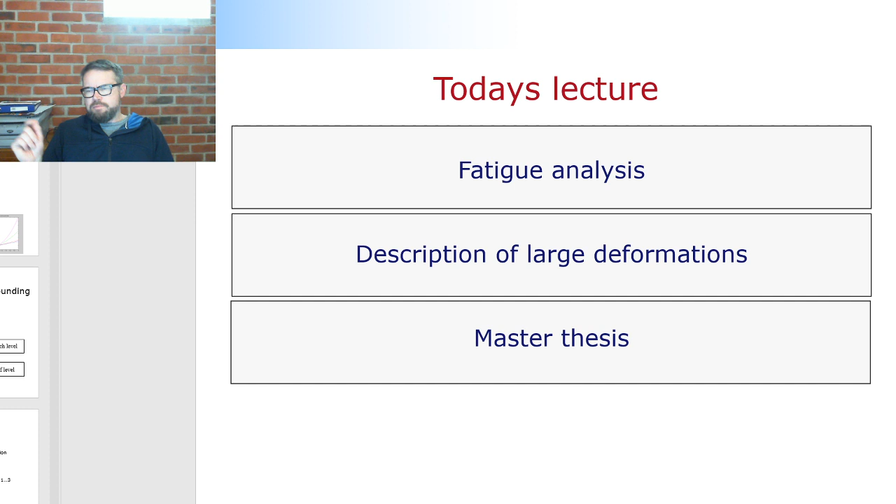Now, today, well, first of all, we are approaching the end of the course, so there aren't that many subject matters to discuss anymore, but I would like to wrap up this discussion about fatigue analysis and how multi-body system dynamics can be used as part of fatigue analysis. That's going to be the first topic today.

And then I would like to spend some time discussing how large deformation can be described in a multi-body framework. This is going to be the main body of today's lecture.

It's a subject matter that is quite painful because the theory behind large deformation is unpleasant. It is very involved and mathematically quite challenging, and that's why I don't want to spend too much time explaining all possible details to you. But some matters I feel are good for you to be aware of, things I'm assuming are good to have as basic engineering knowledge—those are what I'm planning to explain to you today.

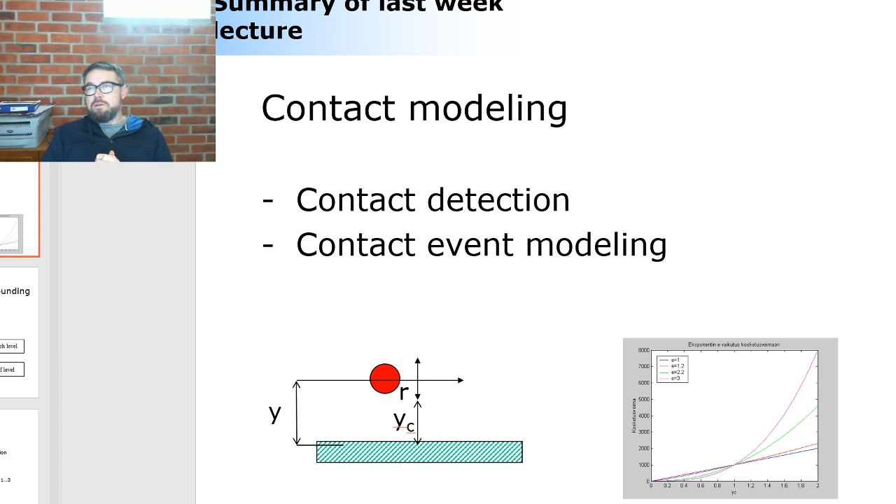By the way, I can see that when my camera is on, I'm looking much better than last week, because last week I did not put much effort into my appearance, but today even my hair is not looking as crazy as it was last week.

So, here's a little bit about how contact detection is based on the bounding box method. As the title implies, the bounding box is a box where the bodies or systems go inside. We have many different sizes and levels of boxes. The highest or largest level is the root level, meaning big objects in your world or models, such that an entire vehicle or entire building could be within one big box, and this is a root level box.

Then you go to a more detailed description. Within the root level boxes, you may have a number of branch level boxes, and finally within the branch level you have a leaf level, which consists of drawing primitives. These are the detailed description of where the contact takes place. This just tells you if there is a contact, and if so, where it takes place and between which bodies.

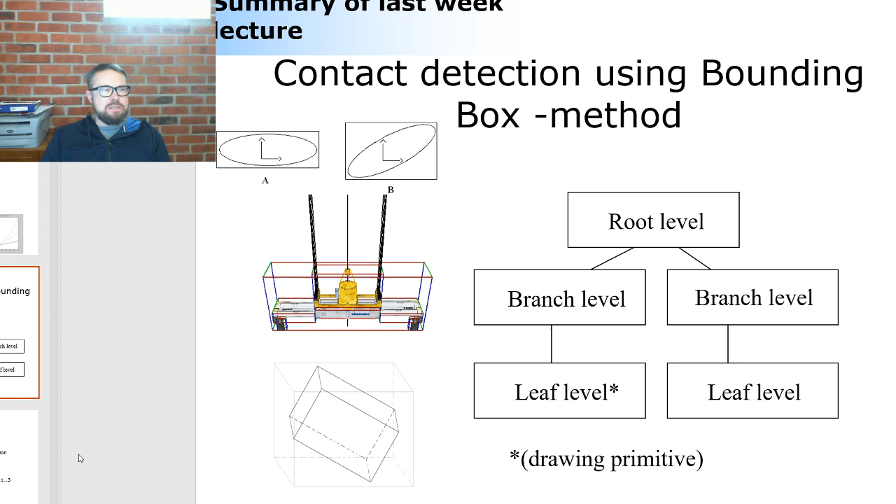Then you move on to the next level, which is a description of the contact itself, and typically this is carried out using a penalty force approach. There are many different varieties in a penalty force description, but the simplest is the one where we just measure the penetration indentation.

In this equation, x is measured as the penetration, and we have a stiffness associated with the contact, which is a material parameter telling how stiff the contact is, or how stiff the surfaces that are penetrating are. Typically this penetration is raised to power n. N here is often a number other than 1, because 1 introduces a bit of discontinuity at the location where the contact just takes place. If it is 2, the contact is smooth and more progressive, which typically helps the computation a bit.

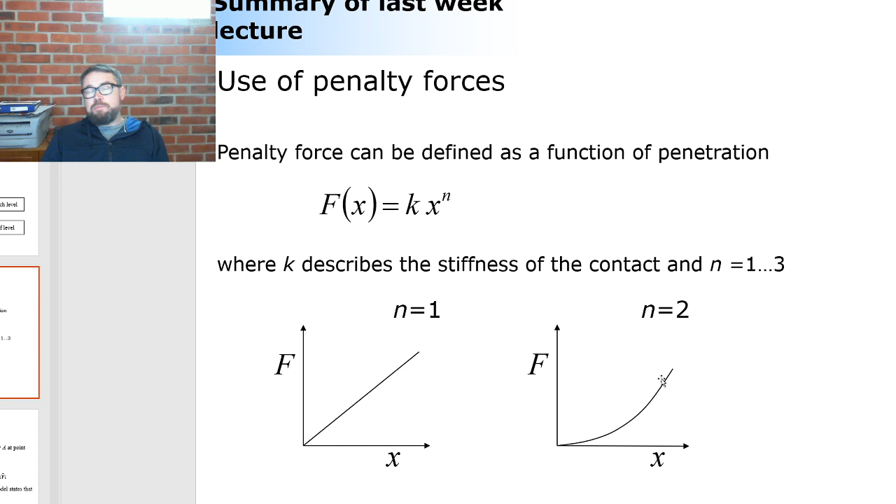The complementary approach is a completely different view of the contact event itself, and this is typically used when you have a huge number of possible contacts. This method is based on inequalities, and there are a number of inequalities, and then you use an optimization procedure to figure out how the system of a very high number of bodies behaves.

Remember, last week we looked at the YouTube movie from Dan Negrut, and he called this a many-body method, not multi-body method, but many-body method. That comes from the fact that there's a huge number of bodies capable of contacting each other, perhaps a million or more bodies that can contact. Again, this is based on inequalities, a mathematically very painful approach, but one sometimes used in the multi-body framework.

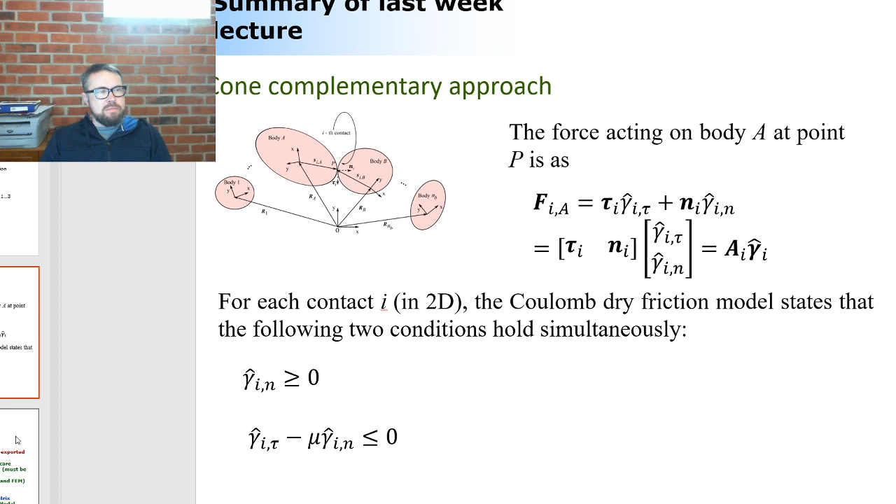Then last week we moved to a completely different subject matter than contact: stress analysis based on multi-body system dynamics. This is needed because often information that is good to know from the virtual prototype is related to strains and stresses. At the same time, even though this is information that is often needed and very useful, it is not necessarily very straightforward to obtain.

That's simply because often we are dealing with rigid bodies. And even if we're dealing with flexible bodies, where we describe the deformation of particles and bodies—particles are not deforming, but the bodies deform—it is still not that straightforward to go from deformation to strains and stresses.

There are two alternative approaches to make that happen. The first possible approach is that we could take all the forces applying in a rigid or flexible body. Because at any given time in multi-body system dynamics, the body is in dynamic equilibrium, meaning all the forces applying in the system are in equilibrium. That means all the external applied forces, reaction forces due to constraints, and inertial forces, when accounted for, are in dynamic equilibrium at any given time.

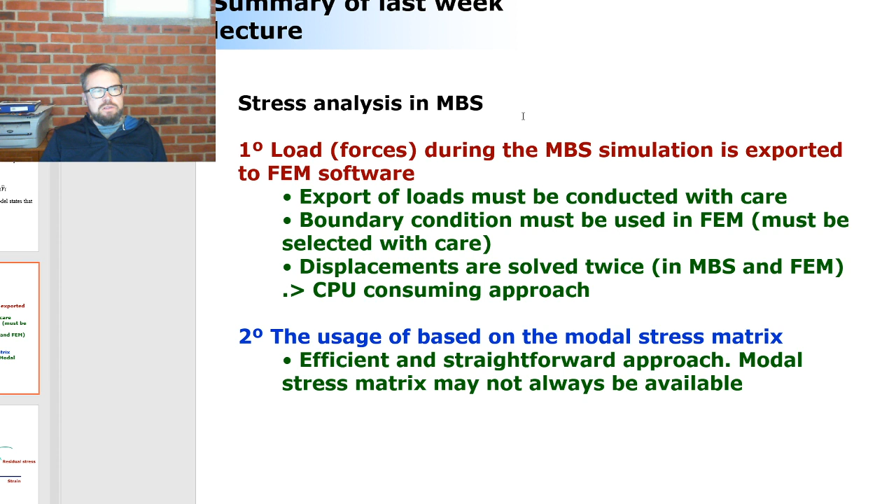Okay, finally, now what we discussed last week—shortly, by the way, the first in-class quiz will be on this subject matter. We discussed a little bit about the fatigue of welded structures.

Welded structures are very special structures, and that's because of two different things. First of all, welded structures can be assumed to include initial cracks. The crack initiation process, which is very lengthy in non-welded structures, is non-existing in welded structures, because the welding process itself introduces very microscopic, very small cracks to the welded toe.

The welded toe is the one located right here—if you see my pointer, yes, you're able to see that. So that's where the welded toe is located. When you look at that very carefully, there are microscopic initial cracks. So even if you have a brand new vehicle or bicycle, if it's made using welding, it's a fair assumption to say there are initial cracks.

And then it's all about the crack propagation process—that's what we have to control in welded structures, to make sure that even though there is a crack, it's not growing too much. Crack propagation is the one that takes up most of the time in the fatigue life of a welded structure.

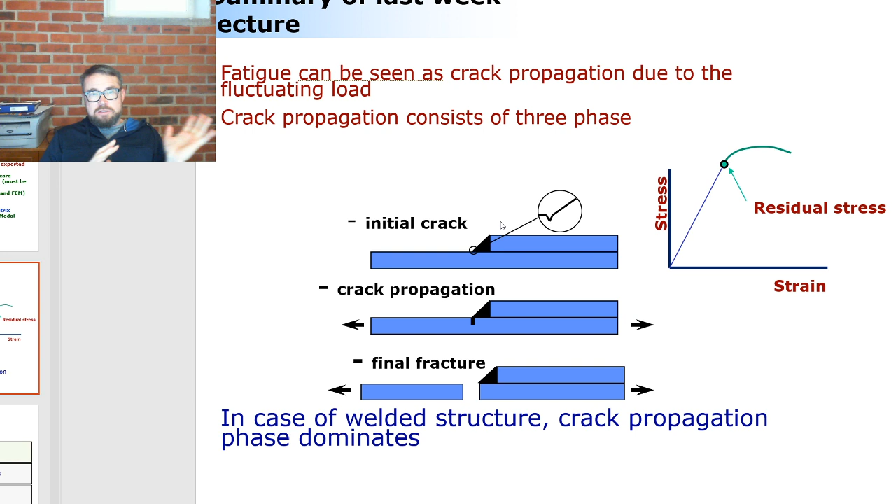We can get back to that in a second, but let's complete this story about fatigue analysis. Sorry that I'm a little slow today, I'm getting started with new subject matter.

Now, fatigue analysis itself—we're speaking not about what happens in reality, but how we can use computer technology to make a prediction about fatigue life. What's needed in a fatigue life prediction is that we have to get the stress history one way or another.

The stress history could be, say, how are the stresses within one hour during the operation of a machine, or how are the stresses within one work cycle, and so on and so forth. It doesn't really matter what the scale is, but this will be the scale of how fatigue is then measured. Let's say I have a hypothetical work cycle, like using a crane.

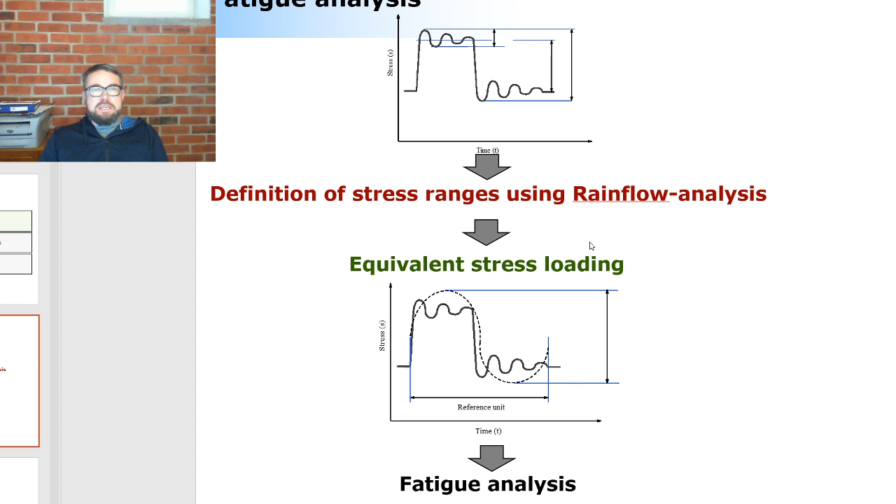Now this is what happens in reality. When you look at what happens very close to the location where the crack is growing, there's a lot of geometrical nonlinearities, and these will increase the stress right where the crack is growing. Using multi-body system dynamics, these rises of stress due to local geometrical non-smoothness cannot be accounted for. So only the level of stresses that keeps the entire structure in equilibrium is something we can take into account, but not the local stresses due to geometrical nonlinearities.

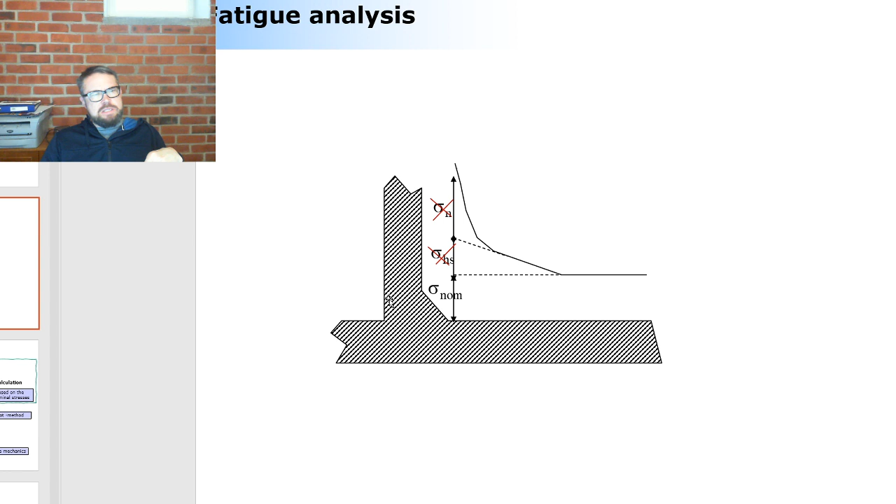But if you want to use these stresses to make a fatigue prediction, you can use literature or make very detailed finite element models to see how these local geometrical details are affecting your results. So from simulation, you can get the nominal level stresses, meaning the level of stresses not affected by geometrical non-idealities, and this is where you can do the fatigue life estimation. We are not going to take a look at the details, but that's how it goes.

If you want to move on to a more detailed description, you can use parameters coming from either literature, detailed finite element or boundary element analysis, or measurements. And even if you want to use fracture mechanics, again you can use literature or detailed finite element and boundary element analysis. So typically in multi-body dynamics, we are limited to this particular section only.

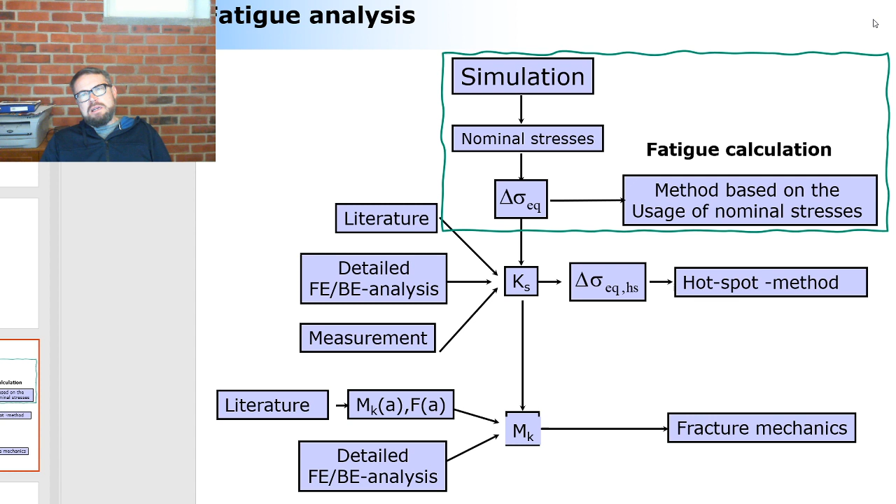Alright, so here's an example. This is a crane that is hydraulically actuated, and it consists of 3 hydraulic circuits and 4 flexible bodies. The bodies are the pillars, lift arm, swing arm, and the telescope arm that is now active in this figure.

The hydraulic circuits are lift arm, swing arm, and the rotary actuator that turns the crane. The crane is loaded by a mass, and the mass is connected to the end of the crane by a rigid link.

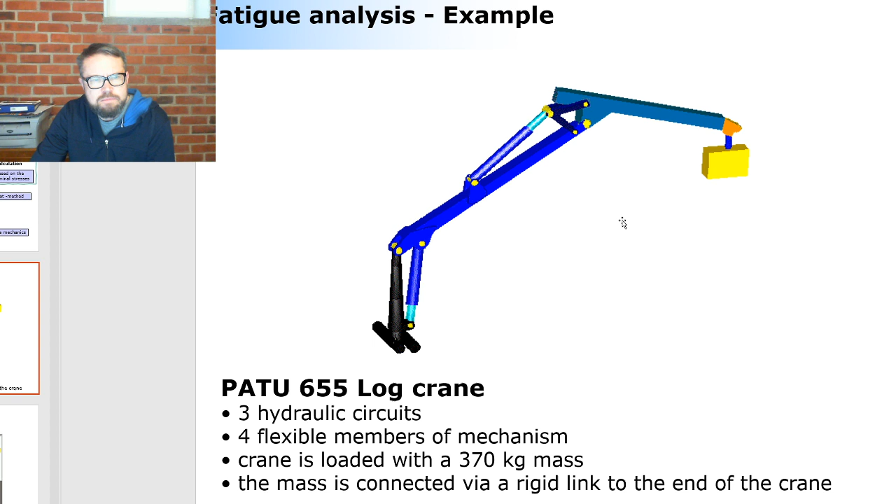This is how, I apologize that the quality is blurred, so it's not very good picture. But if you take a close look at this particular person here, it's too bad you're not with me in the lecture, because it would be fun to organize a competition to guess who this is. Yes, it is me.

Sad to say that I'm unwilling to do the math, but yes, 25 years ago, more or less exactly. So this measurement was carried out as part of my doctoral dissertation.

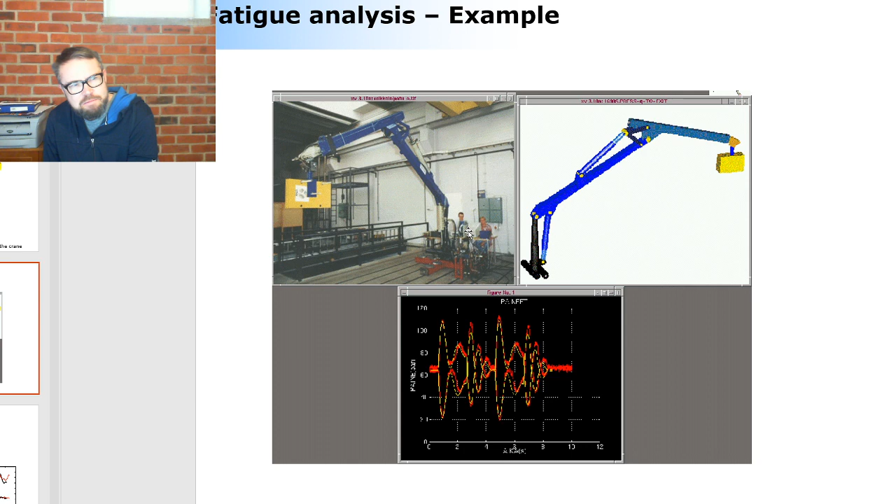Now this is how the stress history looked like. There's measured and simulated stresses, and the stresses come from using this linear theory of elastodynamics technique, while the measurements are carried out using strain gauges. As you can see, the match is very good, so it's looking very good.

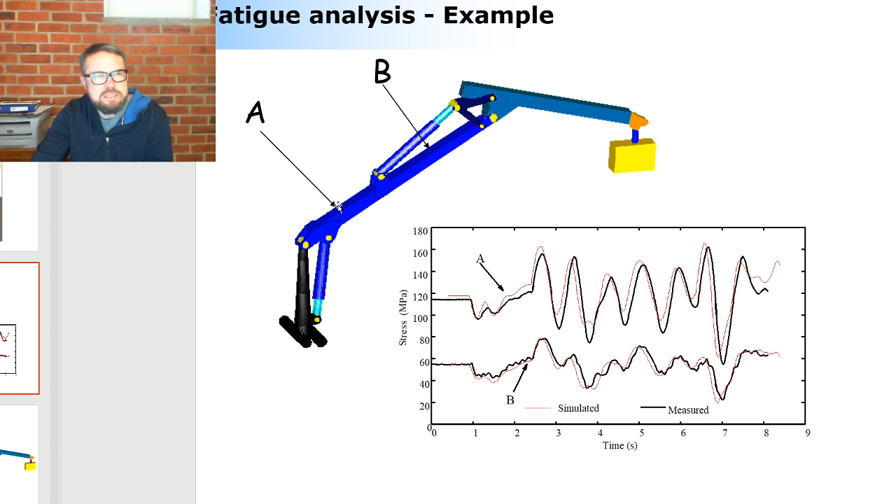We were looking at 2 details here to estimate the fatigue of these details, and the particular problematic detail was the one located here. By the way, this crane is still located in the university laboratory, which is now run by Heikki Handroos.

One of the important lessons from this particular structure is that you have to consider welding as a kind of good friend that can be your enemy as well. That means you have to understand that welding is a risky business, again because of these 2 mechanisms: the initial crack and high residual stresses.

So you don't want to put welding into a location that is highly loaded. Here's an example about this particular crane where most of the welds are really nicely made, not located in areas that are highly loaded, with an exception, and the exception is this one here.

There's a welded nut, used to make hydraulic pipes travel from here to the swing arm. These nuts can be located anywhere you want, and because of that, it makes no sense to place them in a highly loaded area. They are welded to the main boom, and because they are welded, there is an initial crack and high residual stresses, and this is where this particular crane was actually damaged.

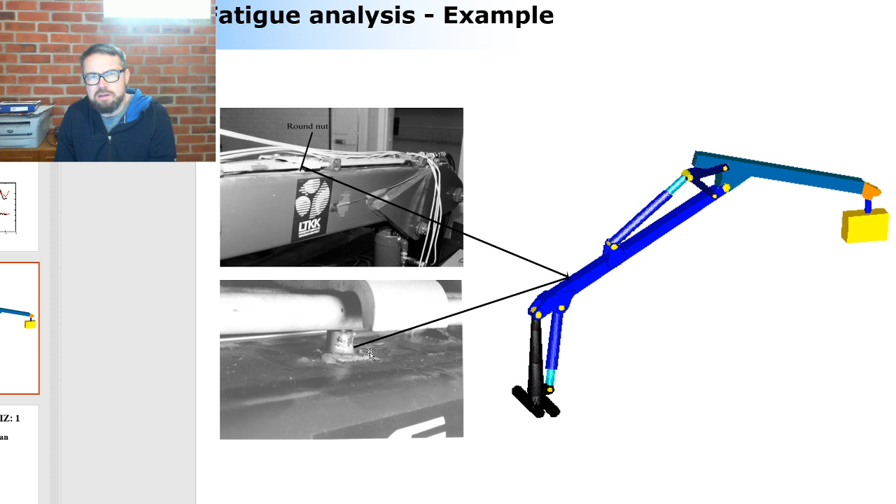So the lesson is: make sure that you're careful with where you're placing your welds.

Now I go back to this question I mentioned earlier. Fatigue of a welded structure can be improved by using a high or ultra high strength steel, using paintings or other finishing techniques, which makes kind of sense because if there's a crack, you paint it, you don't see the crack. It's like an 'if you don't see it, you don't have it' kind of technique. That's option number 2.

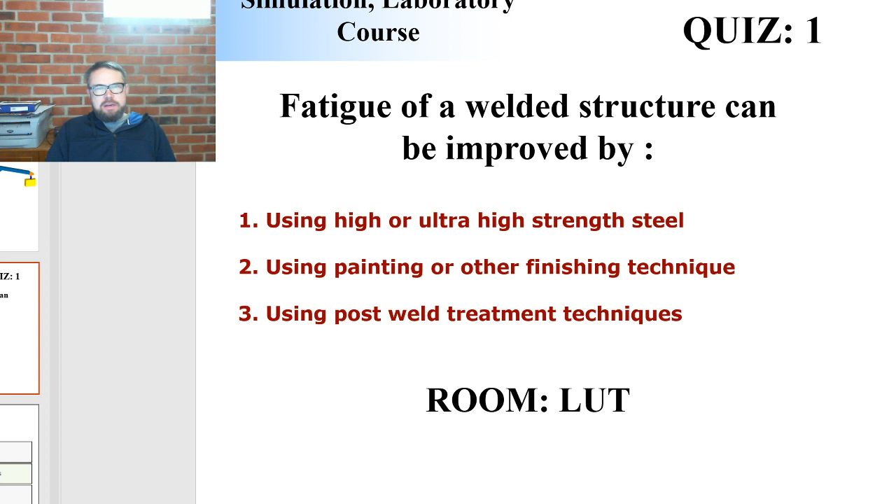Okay, so what is your estimation? What do you say? I think because there are now such strong hints about what the correct answer is, that this is going to be not 100%, but 90%. 90%.

So, using high or ultra high strength steel is a little bit problematic because it's not really solving the two problems associated with welded structures. Using post-welding treatment techniques, this is the way to go. Why isn't the steel approach solving it? Because of residual stresses and initial cracks.

Now what follows is a discussion about large deformation. But first, I really need your feedback on whether or not you want career counseling. If you'd like that, I'm willing to do it next week. Next week's lecture will be wrapping up everything from the second period, summarizing all the visiting lectures, and giving you questions that might be asked in the exam. If you want, that's also an opportunity to discuss career counseling.

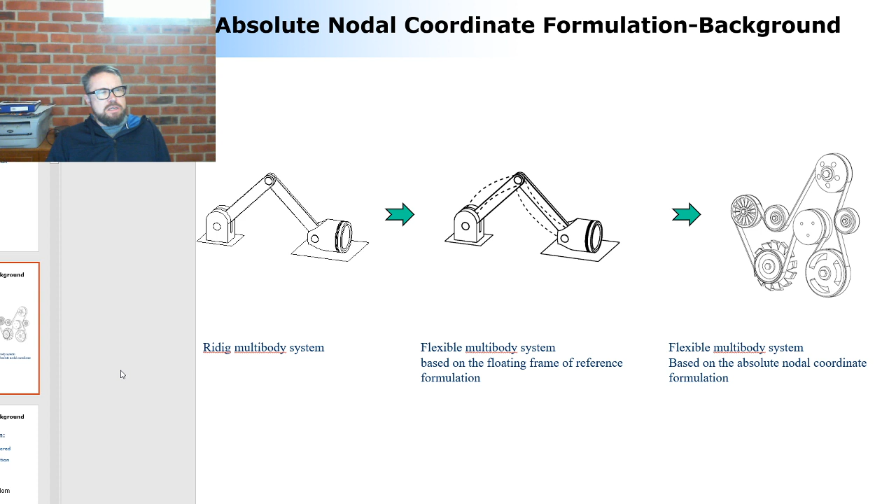Now we're going to take a look at the big picture of the absolute nodal formulation, and see how much time it takes. If we have enough time, I'm also going to discuss master's thesis topics.

Now, what is an important thing when selecting master thesis? The absolute nodal formulation - that's the method we're going to discuss, and that's a method that fits well to structural elements. Structural elements are, roughly speaking, cables, beams, plates, shells.

The special structural feature, like in beam-like structures, is the fact that the beam is very long and the cross section is very small compared to the length of the structure. Plates and shells are very thin, and that's a special feature related to that. Cables are a kind of special case of beams, and this is where the absolute nodal formulation fits well. So it's not using solid elements.

Solid elements can model pretty much everything you want, but it easily gives you a very high number of nodal degrees of freedom. Whereas using cable, beam and plate elements, you typically don't need that many degrees of freedom.

Now, the special feature about absolute nodal coordinate formulation, this is really the core feature of the method, is that it can describe kinematics from any kind of configuration by just using the element shape function matrix and the vector of nodal degrees of freedom.

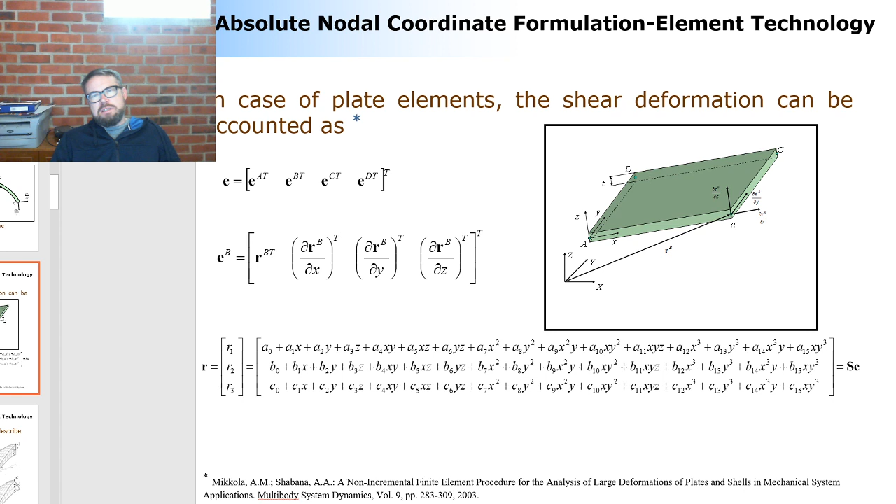So this is how it looks in a beam structure, but this question that I was about to explain, what these additional degrees of freedom describe. Well, they describe cross-section deformation, or fiber deformation in the case of a plate structure. Cross-section deformation means that the cross-section can distort, like shown here. It can be elongated, stretched, or compressed. So this is how it behaves. Cross-section deformation, typically never accounted for in conventional finite element method, is now accounted for in the absolute nodal coordinate formulation. So that's a special feature.

So now I know, I don't see your faces, but I'm guessing that this is as painful as it gets. But let me go back and try to explain what you need to know in terms of the written exam.

Okay, the absolute nodal coordinate formulation. This is a method where the kinematics is super simple, because the kinematics of deformation and large translation and rotation, rigid body translation and rotation, are all accounted for by using a simple linear combination of the shape function matrix and vector and nodal degrees of freedom. Conventional finite element method does not behave like that. It is not capable of describing these large rotations and large translations using this simple kinematics. So this is the first thing that I'm expecting you to know.

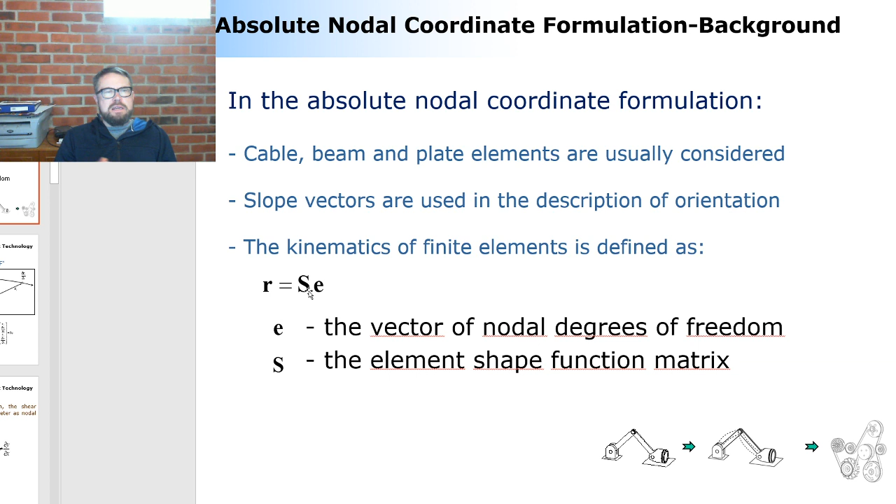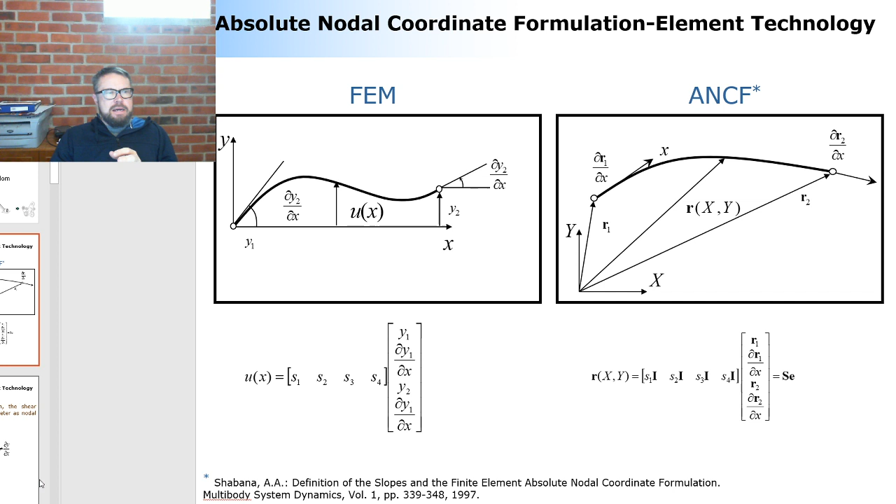The second thing, how is this possible? It is possible because I'm adding nodal degrees of freedom to one nodal location. So in one nodal location I can have many degrees of freedom. Some of them are related to physical displacement and orientation, but some are related to what happens internally, like what happens to the cross-section itself. And that's what the absolute nodal coordinate formulation does for you, capturing the transverse shear deformation, which is important in the case of thick structures.

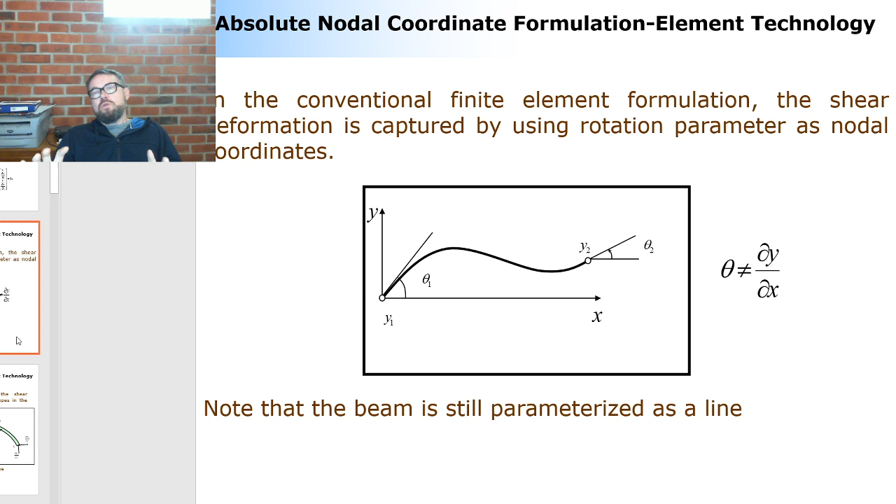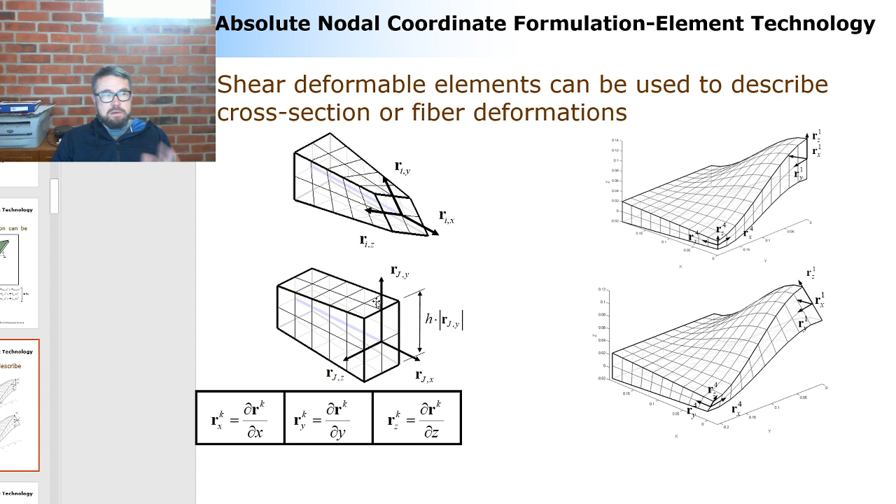Now this is what you need to listen to. Transverse shear deformation is important in the case of thick structures, because I'm going to ask that in a second in my class quizzes. That can be captured by using more slopes in the absolute nodal coordinate formulation. So more and more slopes, and what is the consequence of these more and more slopes? I'm describing more and more cross-section deformation. Clear? I guess it is quite clear.

Okay, then how is it that you can compute the elastic forces? I'm not going to look at that in detail, I'm just saying it can be based on a continuum mechanics approach, which you guys, I don't think you have much knowledge in that particular field yet. You might have it a bit later, but not yet. But it's very straightforward, it doesn't need any particular skills.

Strains can be computed by taking a partial differentiation of this R with respect to x, and this is something you can get automatically from the nodal degrees of freedom. This allows you to give an estimation about the strains, and using the matrix of elastic coefficients you can get elastic forces. So it's super straightforward, just these two equations and that's it.

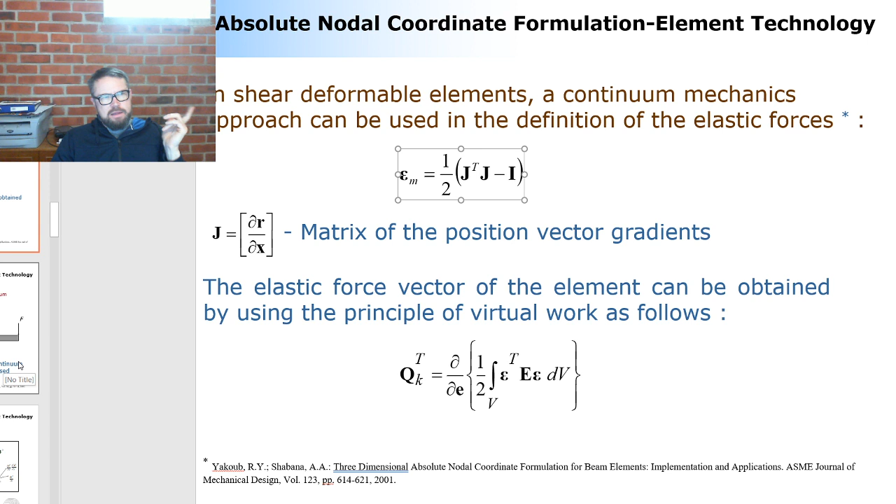Now, what I will do is ask this question first, and then go into a bit more explanation about the features of the absolute nodal coordinate formulation. So here's a question related to transverse shear deformation: when is it important to take that into account? I have four choices: in case of large deformation, in case of thick structure, in case of thin structures, or never as my final option.

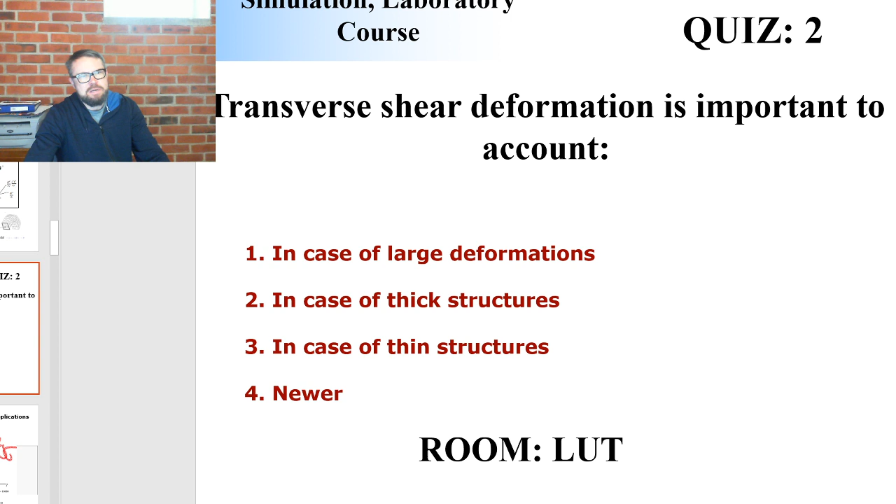Okay, now just shortly. This was a long time ago, 2003, a really long time ago. There was a very important discovery about the method, and I'm speaking about the absolute nodal coordinate formulation. The discovery was the fact that this method too is suffering from different lockings.

Locking is a very common problem in finite element method. What it means is that sometimes an element is unable to predict correct answers, or it's converging super slowly, meaning that even in a case of a simple cantilever beam like this one here, converging can take hundreds of thousands of elements to get the correct solution. And of course this is not how it's supposed to be, because for a simple example like a cantilever beam, you should be able to get the correct prediction using 1 element, 2 elements max. But if you have this locking, then you may not be able to do so. This is very common in the finite element community, that elements suffer from different kinds of locking mechanisms.

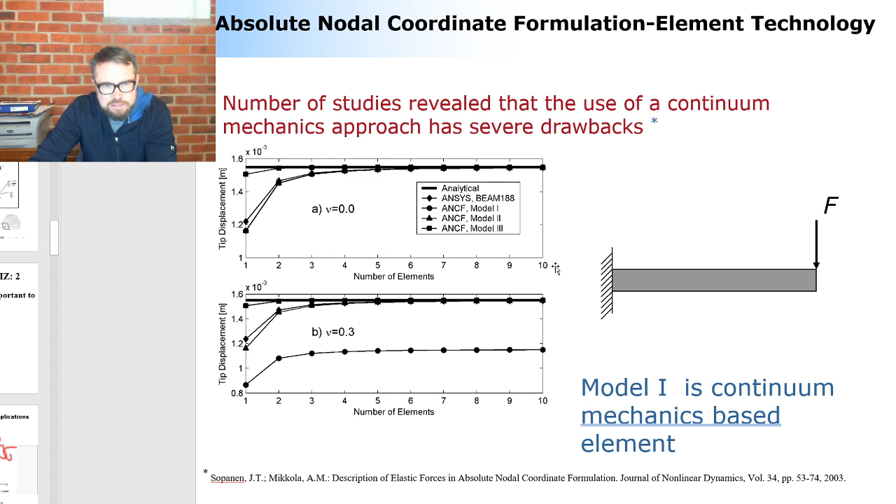The usual remedy, the typical way to fix locking in the finite element community, is that you use lower order integration. So you have a problem in your kinematics, and you're solving it by doing the integration incorrectly. If you're not familiar with finite element technology, it's going to be very hard to understand that. But generally speaking, there is a problem in the kinematics which you fix by making another mistake in your computing. The beauty of these two mistakes is that they compensate each other, and you eventually get the correct solution. So that's the typical way to fix or mix the locking mechanisms, and the same particular way is used in the absolute nodal coordinate formulation as well.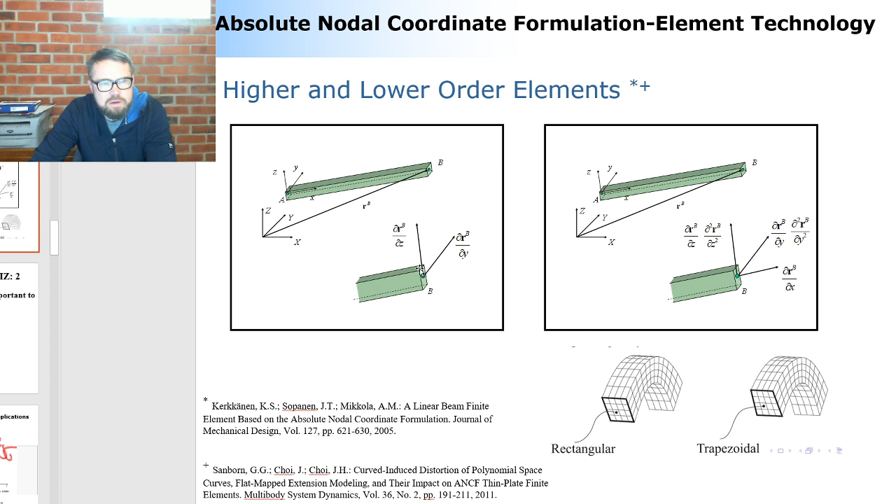Now there are many different kinds of elements introduced in the absolute nodal coordinate formulation. There's a possibility to increase or decrease the number of slopes, and with that you can make it suitable for many different applications.

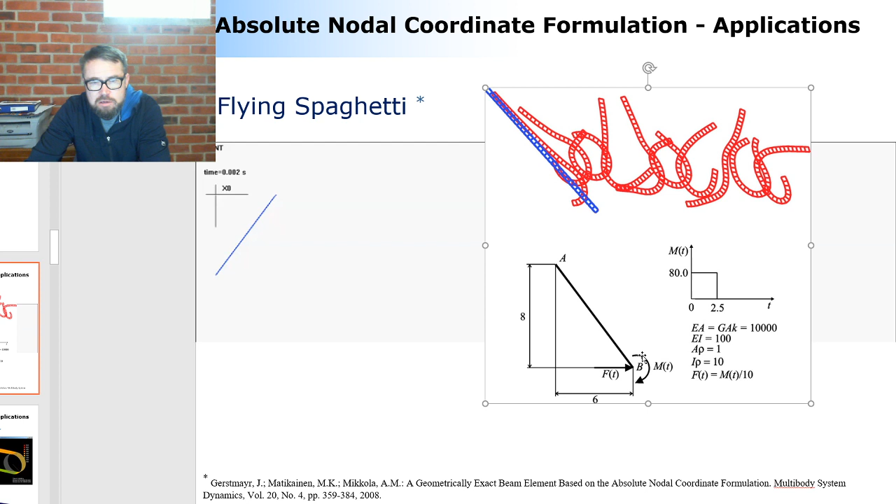So here are just a few examples of practical applications. Well, this first one isn't really a practical application, this is the 'flying spaghetti.' It shows how a very flexible body behaves when you introduce a moment, like shown here, at one end of the beam-like structure. The reason this is actually used is that it's a good reference solution you can use to estimate the accuracy and computational efficiency of new methods. That's why this was also studied using the absolute nodal coordinate formulation. Okay, so now here are the more practical cases.

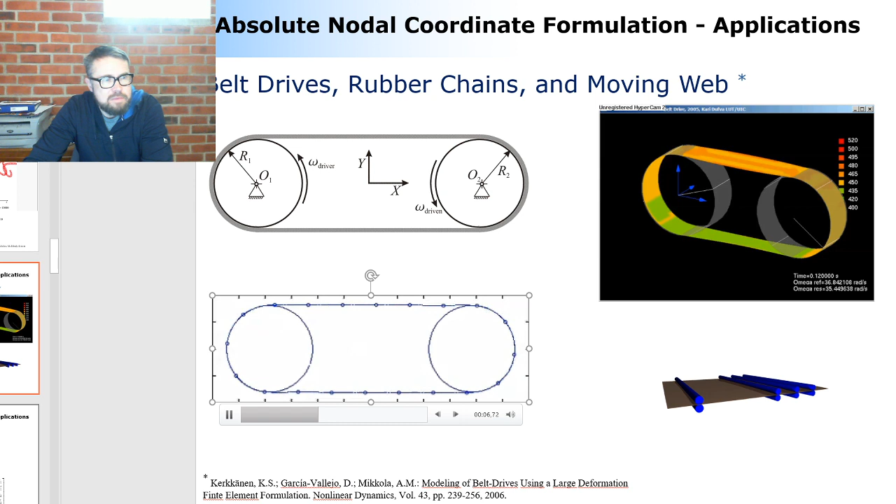So it can be used in belts, like we discussed in the very beginning, and cables like this one here, and it can deal with large deformation. This is where it comes really handy, being applied to cables, and in cables it's used in a very interesting way.

It's used by applying this method, which is an arbitrary Lagrangian Eulerian approach. This is very interesting because the arbitrary Lagrangian Eulerian approach is a method that allows you to change the length of an element during your simulation.

This is actually very handy in the case of cables, hoisting machines, or lifting machines, where typically the cable comes from inside of the machine and becomes longer when you're lowering something, and when you're lifting it up the cable becomes shorter.

Typically this is computationally super intensive, because in order to compute the structure, the element length is limited due to the radius of the pulley, since the cable elements have to be able to go over this particular structure.

There is no way you can model this using one or two elements; instead you have to use many elements. Because of this, the element length should be constant all the time, since any particular cable part could come into contact with the pulley, and that's what limits the conventional approach.

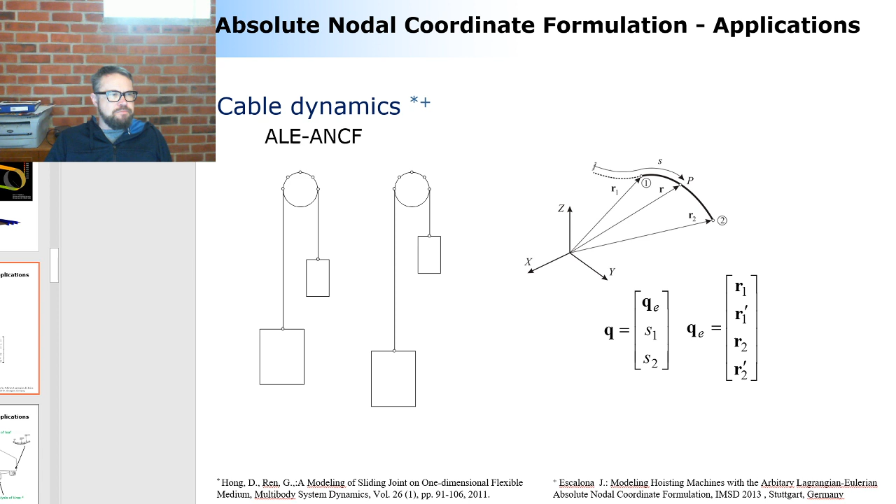Okay, here are some other applications. It can be used in railway or railroad applications, modeling of tires, leaf springs, and so on.

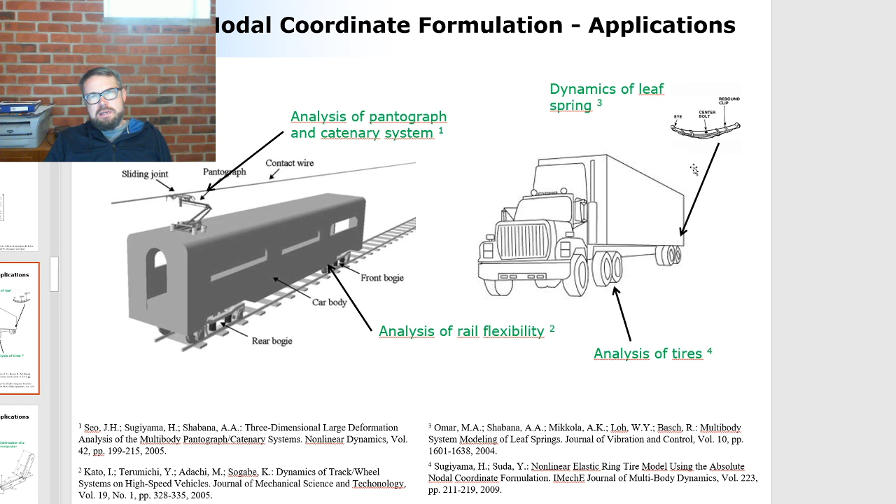In biomechanics—biomechanics, by the way, is a really good application for the absolute nodal coordinate formulation, simply because there's a lot of soft tissue experiencing really large deformations, and that's where the absolute nodal coordinate formulation is very handy.

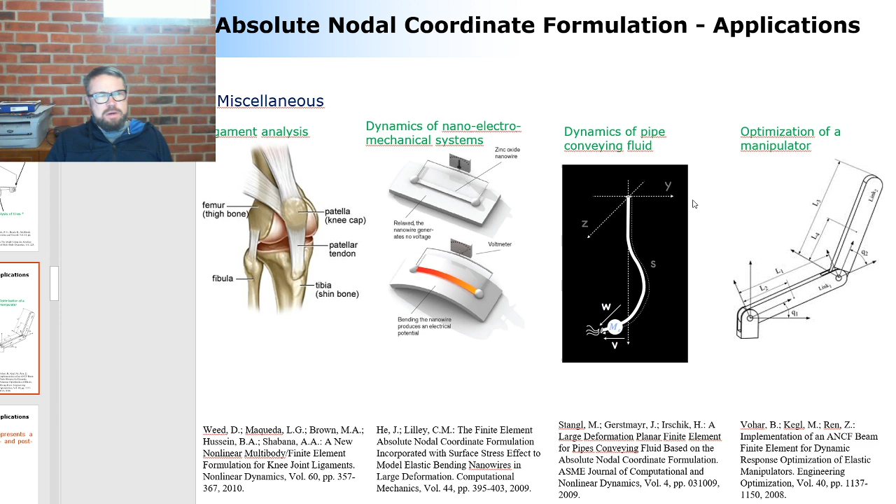Here are some very special applications involving electromechanical couplings, fluid mechanical couplings, optimizations, and then the last trend related to the absolute nodal coordinate formulation is this NURBS business that I shortly mentioned to you.

Now, this is the subject matter for my next in-class quiz. So you need to put your coffee away and give full attention, because what I'm about to explain I will ask about after two slides.

Now this NURBS, which stands for non-uniform rational B-splines, is the description used in CAD software to make graphical representations of drawings. Software like SolidWorks uses NURBS because with NURBS you can make any kind of graphical representation—basically, graphics are NURBS based.

Now the big problem in finite element modeling is that these NURBS have to be converted to polynomials. In the big picture, you take your CAD drawing, maybe reduce the number of details, then move that to your finite element code and mesh it. That means taking your original NURBS representation and converting it to a representation of polynomials—that's essentially meshing.

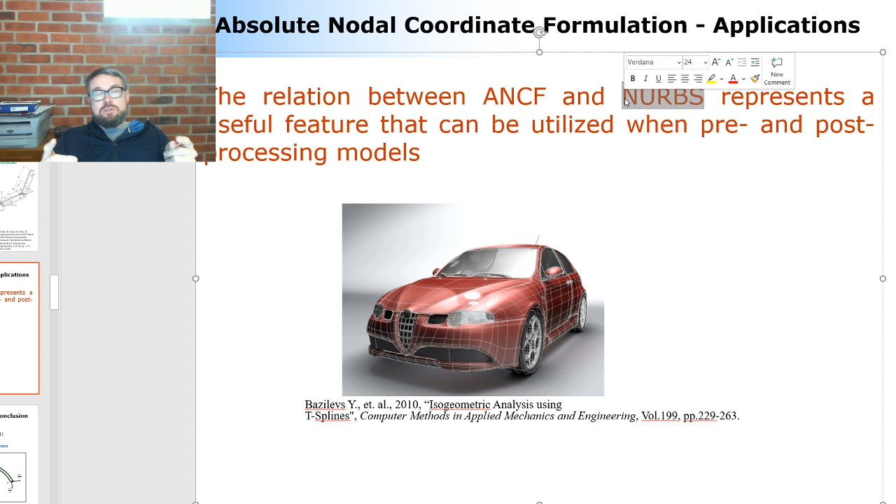It's called isogeometric analysis because it is geometrically so well mapped to geometries that I use in the CAD software. That's what I'm about to ask: what is an isogeometric analysis, and what are the components used in isogeometric analysis? Keep that in mind, because soon I will be revisiting that topic.

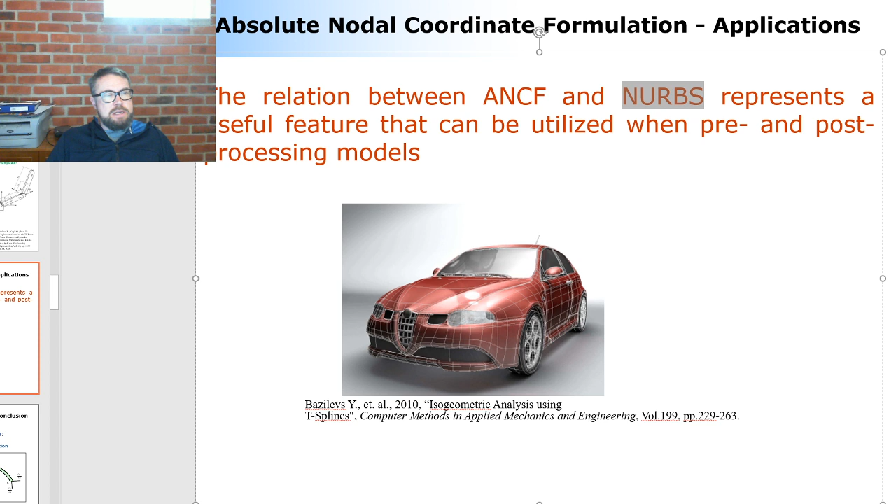Prior to that, here's a summary of the absolute nodal coordinate formulation for finite elements. In this formulation, we use slope vectors to describe the orientation, not rotation, but slope vectors, and we can describe the kinematics using this symbolic notation. Because this is a linear relation, it applies also in acceleration, as shown here. The equation of motion is super simple.

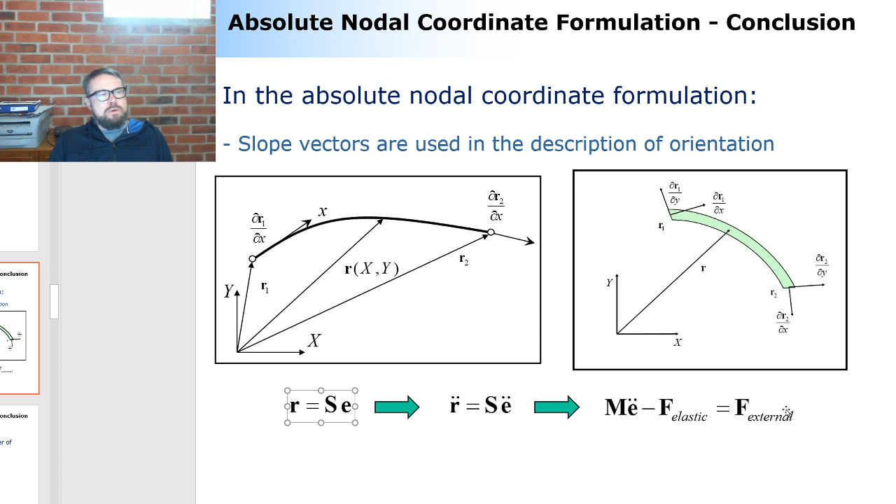It can be applied to a number of practical applications, such as vehicle dynamics, biomechanics, rotating structures, optimization, multi-physics analysis, cable dynamics, and so on.

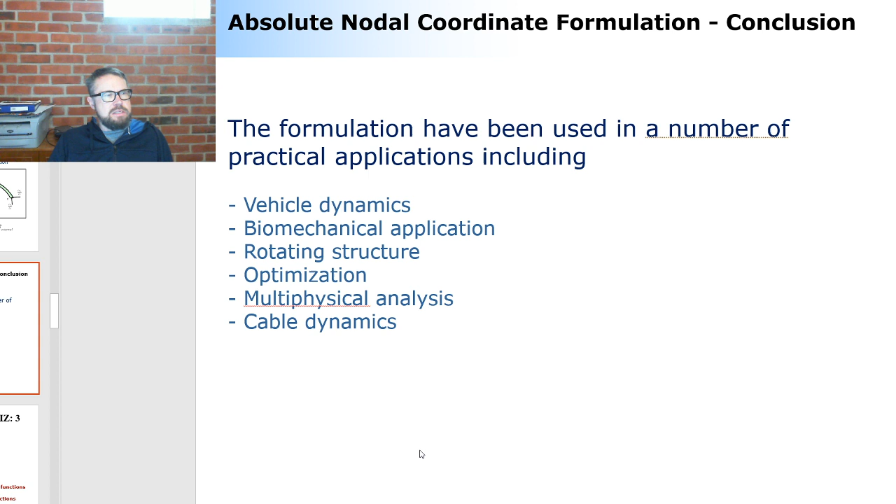So here's my in-class question. In isogeometric analysis, finite elements are based on: NURBS, polynomials, trigonometric functions, or imaginary functions? Now when I'm saying based on... let me get this started. Okay, so it's on, you can go ahead and enter your answer.

And then while you're doing that, I'm gonna just see what these are... okay.

I have 11 answers already.

Now regarding the master thesis: if you already made your master thesis or you're not interested in this subject matter, it will be alright to leave today's lecture here. I'm planning to spend some 20 minutes explaining what is good to take into account when searching for a master thesis topic.

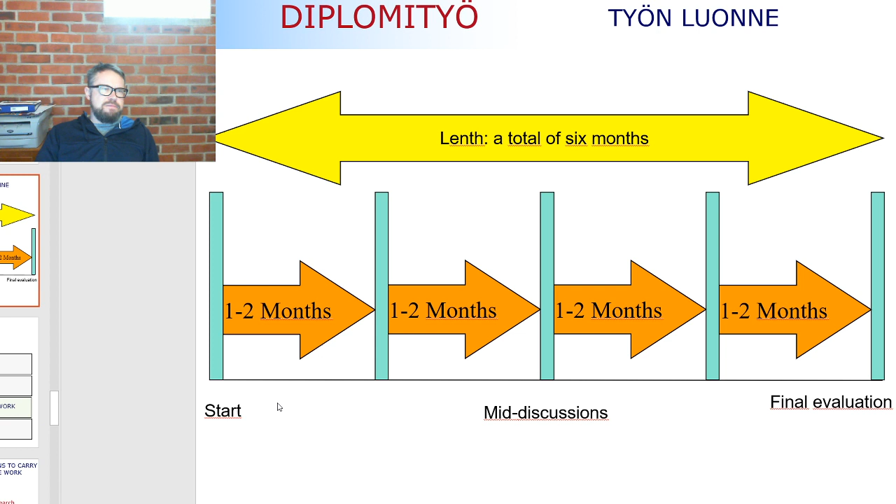In other words, you have to demonstrate your ability to solve large problems. How does it go then? There are 6 months in length, typically with a check-in after 1 to 2 months on how things are progressing, then another 1 to 2 month check, and then the final evaluation. These checkpoints involve communication with your supervisor—could be email, Skype meetings, face-to-face meetings, many different varieties.

Here are my instructions on how to carry out the work. My instruction is that it makes sense to create a table of contents right at the beginning, kind of creating the plot, the storyline for your thesis.

The storyline, the plot, first of all helps you focus—it helps you make sure what subject matters are not core content of your thesis. It can also be used as a timetable: if you have different chapters planned for your thesis and you realize you've been stuck in the introduction for 6 months, that's a serious problem. So the table of contents is super important.

It's important to organize a kickoff meeting with your supervisor and whoever is the company or the beneficiary of your work, and then make a high quality literature review early on, because it's possible that something very closely related to your thesis is found out too late, and that's very unfortunate. So it's good to figure out all the important literature as soon as possible.

A good literature review can be done using Google Scholar, Scopus, and Web of Knowledge. Each has some advantages and drawbacks, so it makes sense to use all of them. And really, writing is something heavily recommended to start in the beginning.

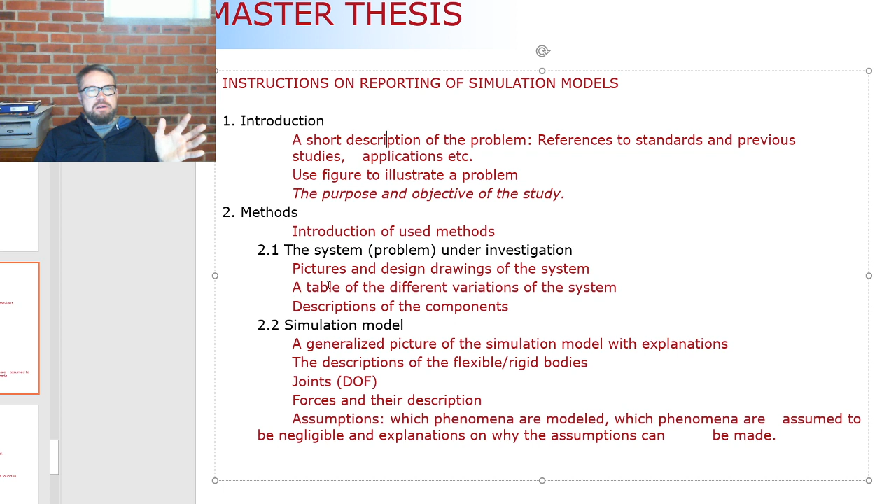The method section really depends on the subject matter—this is too much about simulation, it doesn't need to be that way. The results section is where you explain the outcome of your work. Then in the discussion, you look in an objective manner at how it really feels, what benefits you can create, and what observations you can make from the results. Conclusion is just a summary of the work.

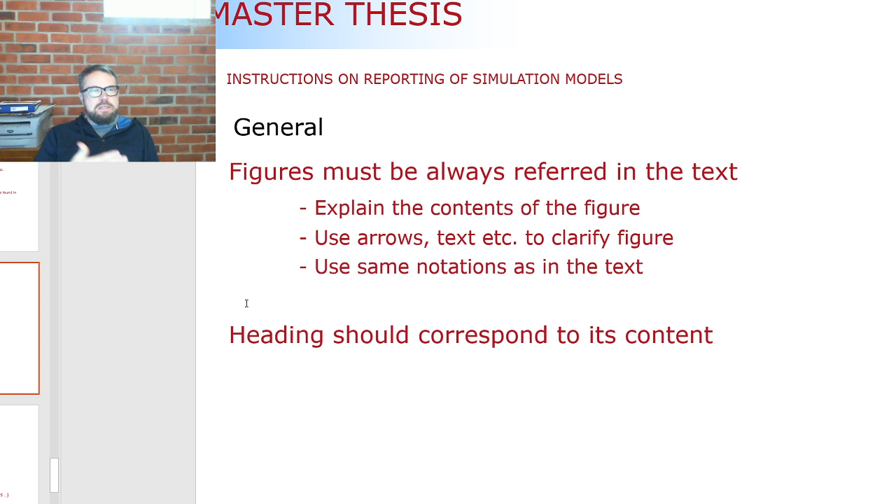Here's some general instructions you may follow: figures must always be referred to in the text. Explain it like you explain things to me—something that takes time to learn—so don't expect too much from your reader. Make sure the headings correspond to the content.

Here's some other instructions: use passive voice, don't try to be funny. This is important because every now and then a student wants to make jokes in the thesis work. There's no case where we've been laughing, so it's never a funny thing—this is not a comedy book. Instead, try to be boring and use exact engineering language.